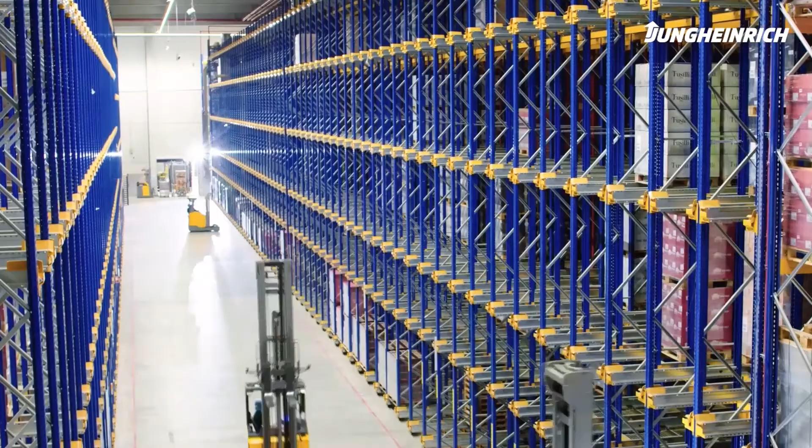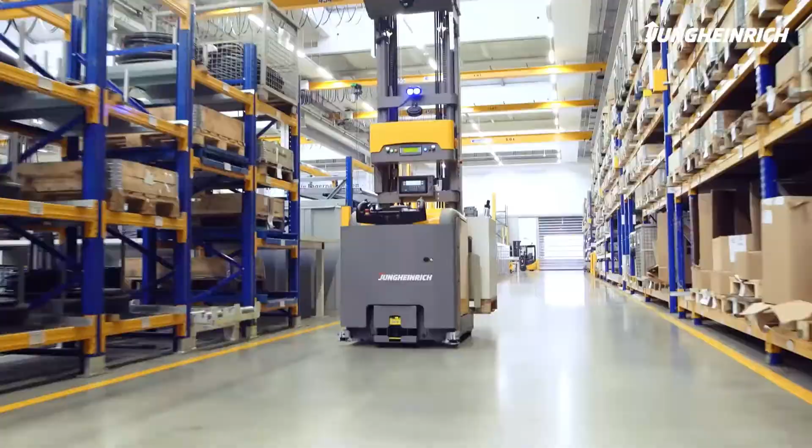The world of intralogistics is becoming increasingly complex every day, more challenging. Unimagined growth rates in intralogistics often push warehouse performance to its limits. In many sectors, 24/7 operation has become the norm. Efficiency in processes and excellence in technology are needed to master these demands day after day and to remain competitive. Jungheinrich automated guided vehicles offer the best foundation for this and achieve efficiency in motion.

Welcome to our AGVs 101, Starting Your Automation Journey webinar of Jungheinrich. Jungheinrich is well known for forklift trucks, but also for AGVs, ASRS, and automation solutions. MCJ Supply Chain Solutions is the North American automation joint venture. My name is Kai Beckhaus. I'm president of MCJ. And I'm Tim Harrison. I'm the director of AGV sales of North America.

Starting your automation journey, what we want to cover today is to explain why you should automate, present AGV solutions. An important aspect is the integration of AGVs into your existing environment, the types of energy system, there are different considerations to take, and milestones for a successful implementation. Why automate? Tim, what would you suggest to our audience? What is the main reason to automate?

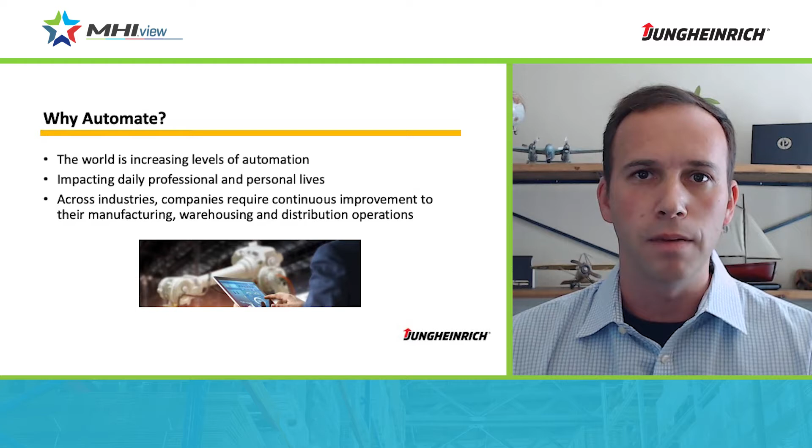Well, Kai, the world is increasing the speed at which we automate. And that automation is impacting so many different areas of our lives in both the workplace and at home. And this adoption of automation is not just specific to one industry or one type of business or one vertical. It is spanning across industries, across categories, and it is impacting us both here domestically in the United States and globally.

So as we have all been impacted over the past couple of years with the pandemic, a lot of businesses have been looking for new ways of increasing productivity, as well as dealing with these labor shortages that have been very impactful to everyone. Supply chain issues have been tremendous, and the only way to overcome these issues is really to provide automation at a much higher pace than in the past.

Tim, what are different areas where we see automation besides our industry? Well, Kai, we're seeing it in the automotive sector, in self-driving cars. We're seeing it in the food service and restaurant business with the way that we order our food and the way that our food is being prepared. And then we also are seeing this at home, from appliances that can be started right from a smartphone app to thermostats that make adjustments based on the temperature that's outside.

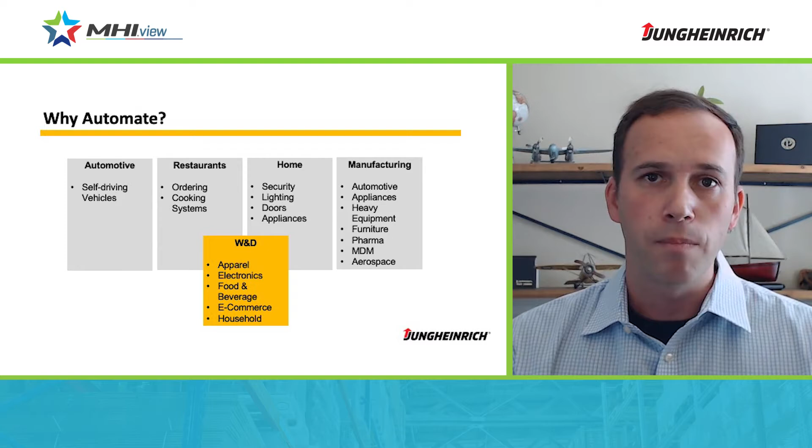And automation is also being adopted in manufacturing, in so many different verticals, from pharmaceuticals to medical device, the adoption of automation is throughout. And then this automation is also being pressed over to warehousing and distribution. In warehousing and distribution, automation hasn't been typically known, but now because of the major supply chain constraints we've seen over the past couple of years, the companies in this space are looking for ways to automate to overcome the challenges that they're seeing.

In addition to the burdens that we've seen over the past couple of years from COVID and the pandemic, we've also seen general trends in the businesses, from labor shortages, where it's hard to find good people to pull into your workforce, to labor costs, the increasing cost of labor, as well as the benefits and the burdens of that labor. And then we have seen this ever increasing demand on supply chain optimization. All of our customers are wanting what they want when they want it, and now at an even faster pace. So we have to keep up to meet those demands.

And then there's also a factor of safety. With all this need to increase productivity, our workforces are being stressed and safety is being impacted. So we want to overcome that, and we can do all these things with automation.

So Kai, what kind of AGV solutions exist out there? What we have in our portfolio, Tim, is from left to right here, the Stacker model, which is the most versatile vehicle. It has regular forks, so it can handle all pallet types, floor, rack, conveyor applications. The second one is the Tugger, a very typical example in an automotive environment where it is supply from a supermarket to a production line, and you pull a couple of carts that could either have special dunnages, special carts, or just a pallet on a cart to be transported.

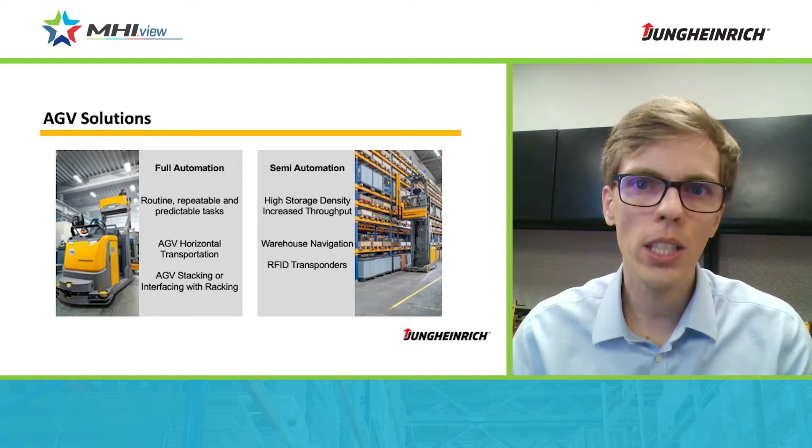With those, there is also the possibility to opt between a full automation and a semi-automation. So the full automation is most recommended when there is routine, repeatable tasks that are easy to automate. When it's a horizontal transport, when it's stacking, even interfacing with racking, all of that is an indication for full automation. In the turret truck segment, a semi-automation with increased throughput is possible with warehouse navigation, utilizing RFID transponders in the floor and automating the approach to the location, but still requiring a human being to do the fine positioning and the load handling act at the end.

Kai, those are some pretty interesting solutions that we have there. What do we need to look out for when we're looking at AGV solutions? Yeah, that is a good question, Tim. There is important selection criteria for every application. Despite automation being a general trend, there are still some environmental constraints that make an application very suitable or not so suitable for automation in general.

The considerations that we ask our clients to discuss with us are load units, first of all, because the load handling is an important part, pick up, drop off, so the load units that are transported are an important aspect. The volume, mainly, that is required to really identify how many AGVs we need to cover the peaks of that throughput that is required. Temperature considerations, floor conditions, obviously an important aspect. Space requirements for the turn, there are safety norms that the automated technology has to fulfill, so we need to take a look at the layout.

Number of shifts goes along with the throughputs to calculate the ROI and the labor content that would be done and saved. And also the integration part, we'll talk about that in a minute. A warehouse management system software to connect to, to identify what process integrations we have to do.

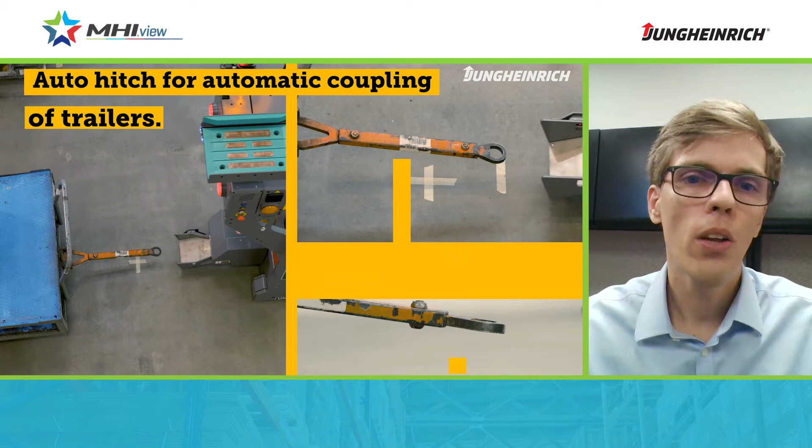In this video, we see a few of our applications in moving picture. Let's start with the towing application. You see the tow truck here with the laser safety systems. So when an obstacle is in the way, the truck stops, and once the path is clear, it continues. Our vehicles are the first with an automatic unhitch that we see here, and also hitch functionality to connect to those carts automatically. The pallet trucks that we see in this clip are for low-level transport, floor-to-floor goods.

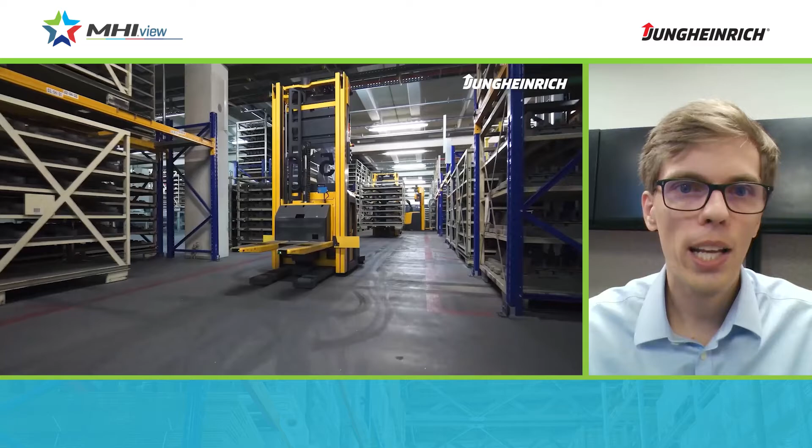From the portfolio, finishing up with the very narrow aisle solutions, our automated turret trucks. We see a truck here with a bus bar system, energy system. We see the speed that it traverses through the aisle, and it can here in this system be with automatic contour checks on the P&D, pickup and deposit stations, that allow us to fully automate the process and have multiple vehicles serve multiple aisles, so it's not as fixed as an ASRS solution, and gives you a lot of flexibility to scale the solution with additional trucks, have aisle change, and accommodate whatever throughput requirement there is with the best ratio on storage density

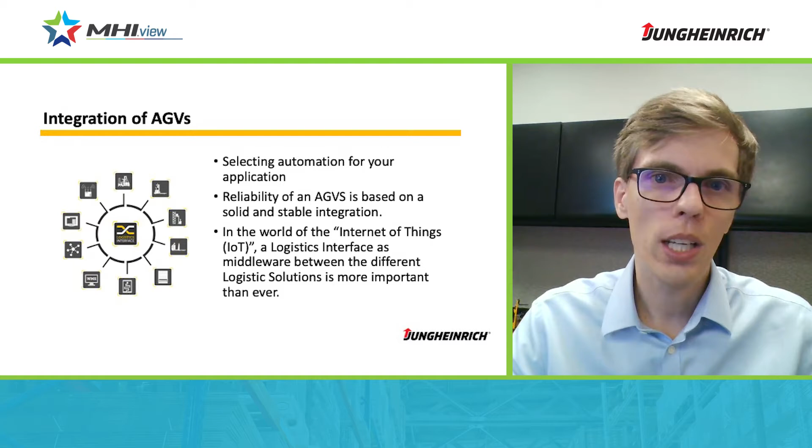We have connected to basically all warehouse management systems of a name that are out there and make the connection more important than ever and more efficient than ever possible with utilizing the logistics interface. The integration follows a scheme, you could say a little house here. So the top level is the enterprise resource planning systems, which control what goods are in a warehouse.

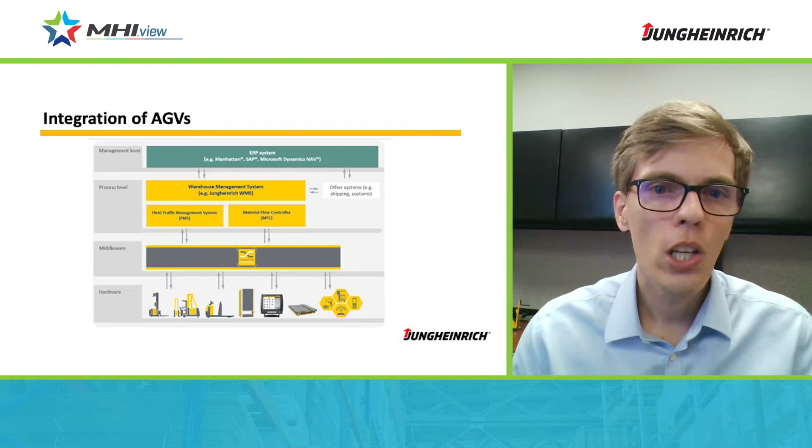The next level, the process level of warehouse management, is controlling what pallet actions are being done and what transports are being done, all of those transport orders. Then our logistics interface on the middleware level connects that level to the hardware and translates all of those machine languages, starting with an animation.

And this connection we can really see as filling a void. The trucks and the warehouse management system would not speak the same language. So this additional level comes in, the logistics interface, to connect and translate between those two systems. Okay, Kai, so it looks like the logistics interface is combining some systems and providing the missing link there. But what exactly are we connecting here?

The two functions that the logistics interface does at a high level are, on the one hand, the IoT connector. It really allows the connection from the language, from the technical data transmission. People of our customers would be involved here to discuss whether it is a database connection or whatever technical data way and format they would like to send the data to the Jungheinrich automation.

The second part that we see on the right-hand side is the process manager. And process management, to give you a very easy and simple example: let's say the warehouse management system would have the most specific command as a transport from A to B. The AGV system can only understand a pickup from A and then drop this pallet at B. So that is the easiest example of process management, of taking this WMS command from A to B and splitting it into two separate ones.

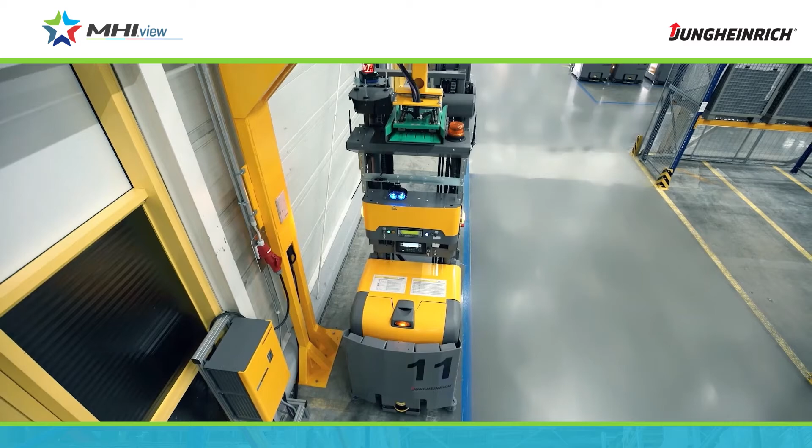And as you can see in this short clip here, here's an AGV that's docking up to a battery charging station. And these systems are very space efficient and safe, so you can utilize them throughout your facility where it makes the most sense.

We have seen the capabilities from the integration and energy perspective besides the portfolio, Tim. So what are the project phases that potential clients look at installing an automation in their warehouse? Well, Kai, why don't we look at a short little clip here that talks right to that point.

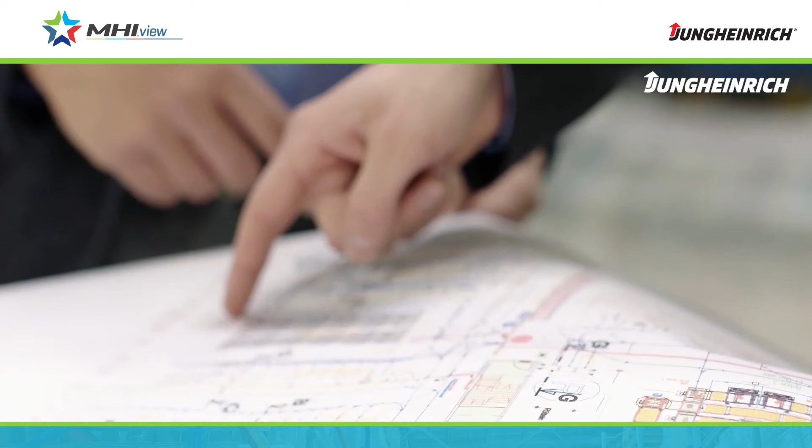Automation with automated guided vehicles from Jungheinrich is divided into 6 successive project phases in which we accompany you step by step. 1. Proposal phase. In the proposal phase, we therefore look at everything, from the current processes and conditions to the IT interfaces. We compare this with your needs and create an offer tailored to you.

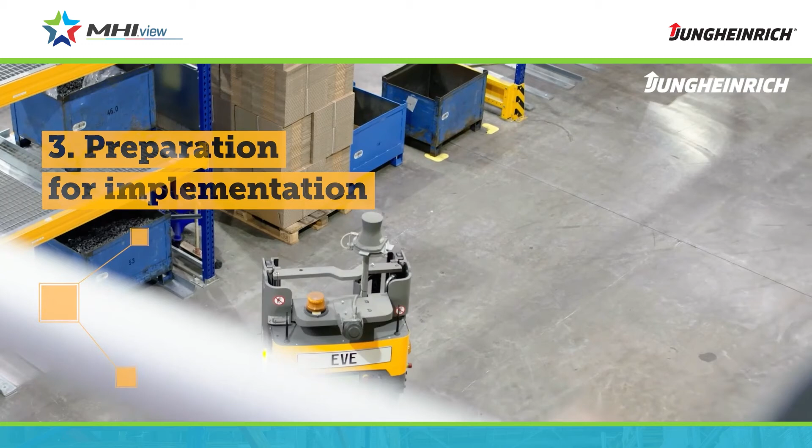2. Definition phase. Now the processes are defined in a requirements specification. This forms the basis for all technical and scheduling processes of your project. A real-time simulation can now begin. 3. Preparation for implementation. While production of the automated guided vehicles begins at Jungheinrich, the software and the environment are prepared at your site. One major advantage is that there is no need for reconstruction in your warehouse.

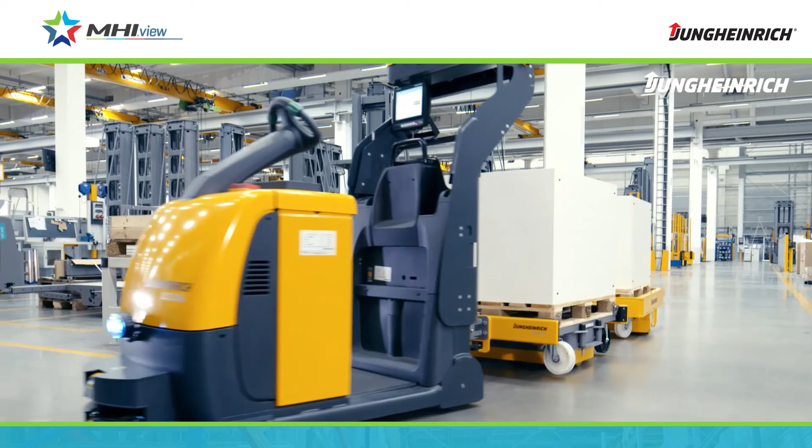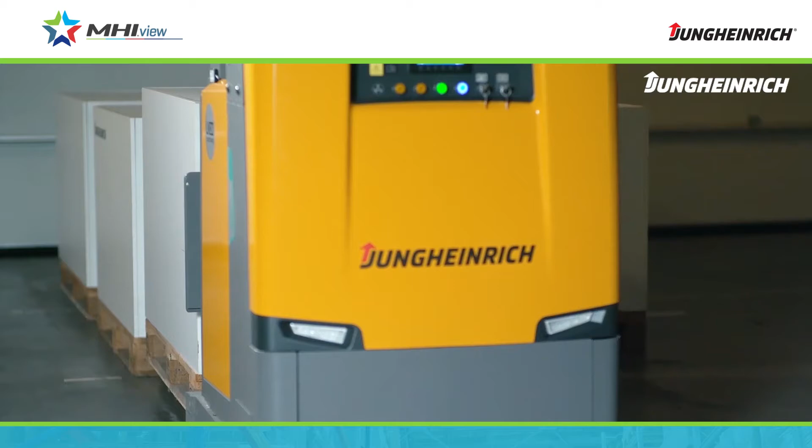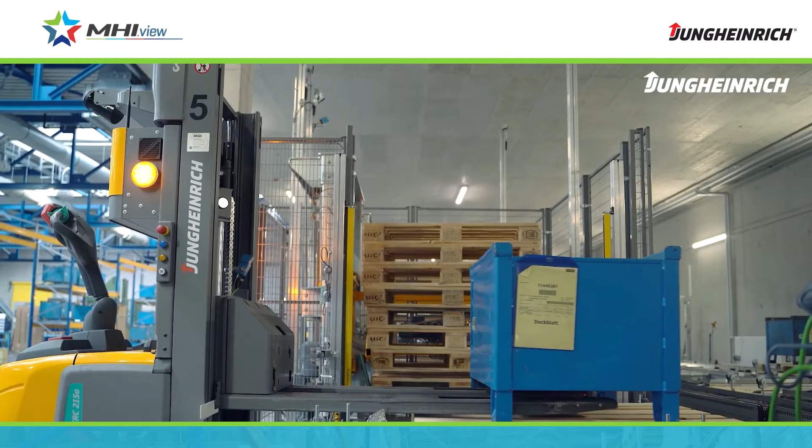4. On-site system implementation. And now we're off. First, the vehicles are tested on site, then personally integrated into the system by our team. Fine-tuning ensures smooth processes. 5. Startup assistance. For the start of your new automated system, we are on site, accompanying your employees, allaying any fears, and conducting training on the job for smooth transition to productive operation and for efficiency in motion.

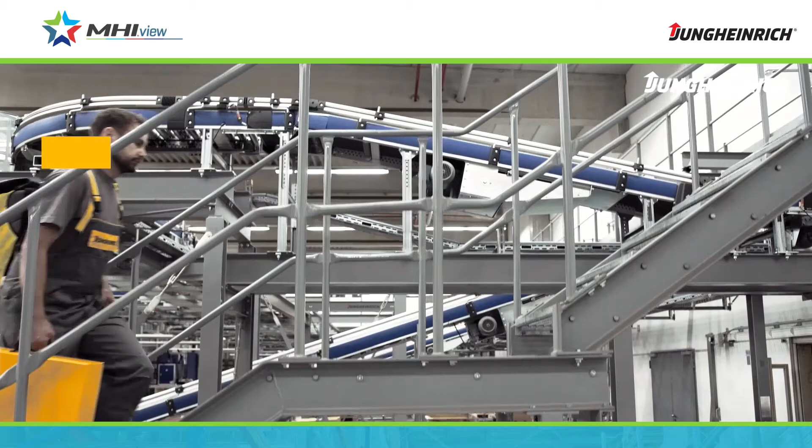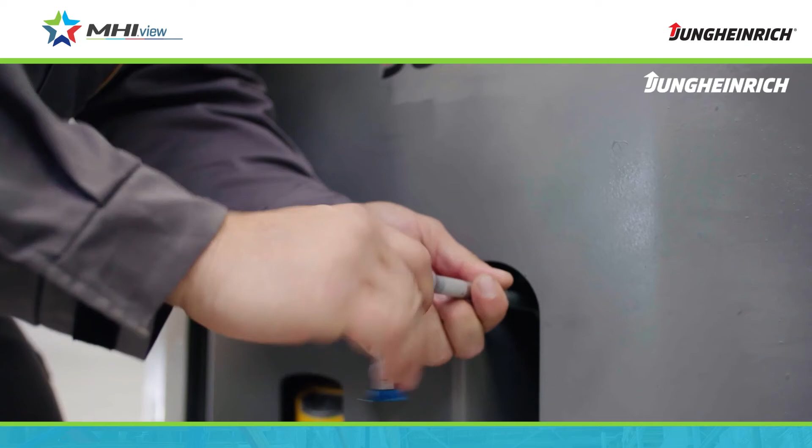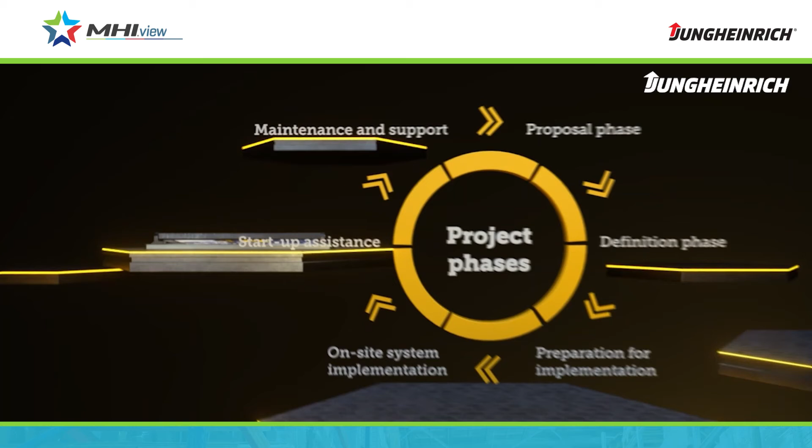6. Maintenance and support. With our service network, unique in the industry, with more than 4,500 service engineers and our 24/7 support hotline, we are always there for you, even after the handover. You too can successfully automate your intralogistics with an experienced partner. With automated guided vehicles from Jungheinrich.

So as you see in the video, there are a lot of different phases to an AGV project, but we can break these down in a more practical sense with this outline shown here. So first off, we start off with a bit of a site review and data gathering. We come out and visit with your site with our distribution partners and determine whether your application is a good fit or not, and maybe even provide some new ideas for how you can utilize AGV solutions in your facility.

After you've made a decision, you would place your order, and that kicks off a lot of different tasks that will happen on the back end that you might not be privy to, but nonetheless, the actions are occurring, such as order placement with the factory, software systems being scheduled, etc. We will traditionally, after order placement, have a project kickoff meeting, and in that meeting, we will outline the timeline of the project and let you know what you should expect from us, and also we would discuss with you what we would expect from you as our client to ensure a very successful implementation.

Then, in a matter of weeks, we will see the delivery of these AGVs to your site, and once these AGVs are delivered to your site, we will begin the on-site software and hardware implementation. And this will generally last several weeks to a couple of months, depending on the scope of your project and the level of complexity. And then once we have everything finished up, we have the AGVs operating properly, we have met the deliverables of the project, then we turn the system over to you and allow you to start gaining actual use from the system and seeing the return on your investment.

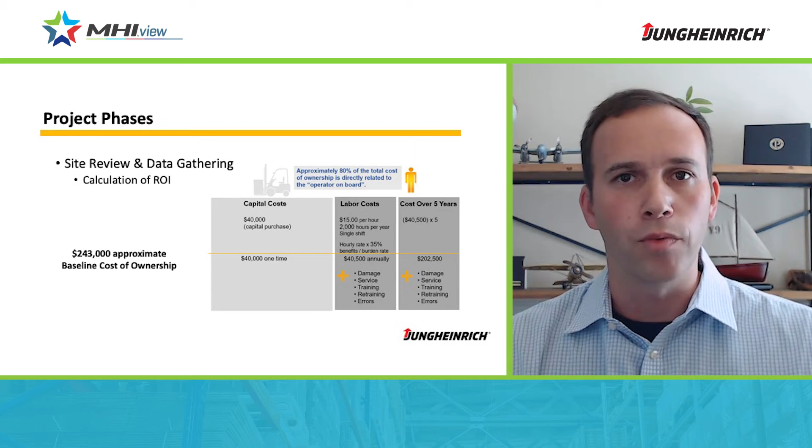Which is significantly higher than an AGV system. So in that next phase of the project, you're going to look at ordering a system. And there are some key things that you need to keep in mind when you are selecting your vendor and even your solution of choice.

The first one is to look at: is it a standard or a customized product that you are choosing? Especially from the hardware side, if you have a manufacturer of a forklift truck as a base for the AGV, you benefit from the high volume production, which also goes along with the models that are used for the base truck, and then customizations being applied to that, giving you the benefits and cost efficiencies of production at scale.

Yep. And then also your energy solutions. What options exist there? Is it lead acid? Is it lithium ion? It's important to note what are those differences with respect to your solution.

We have discussed the IT integration earlier on, a very important aspect in the vendor selection process. You do not want to be left alone at the end coordinating between your systems, the AGV system, and then potentially working with a completely separate IT vendor, systems integrator, to have those communicate to each other. Make sure to pay sufficient attention to the IT setup and how your new automatic system is linking to your existing environment.

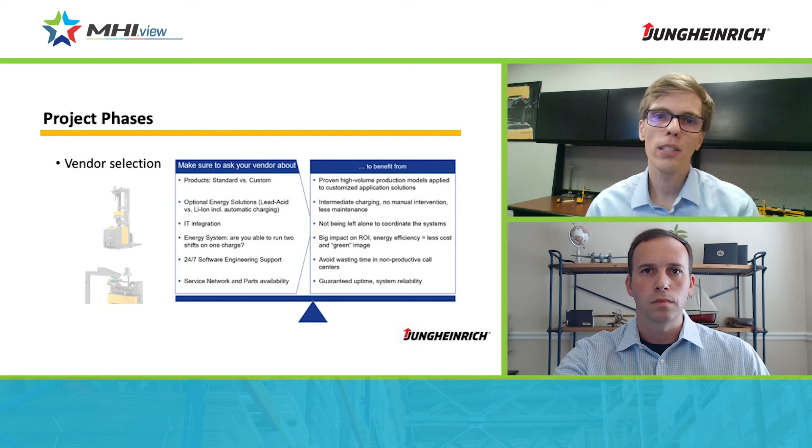So we've covered why we should automate. We've also discussed the different AGV solutions. We've talked about how to integrate these AGV solutions into your processes from a software standpoint. And we've discussed some different energy systems, the lead acid versus lithium ion battery, as well as brought up the main phases of a project and how important they are to the successful implementation of your AGV system.